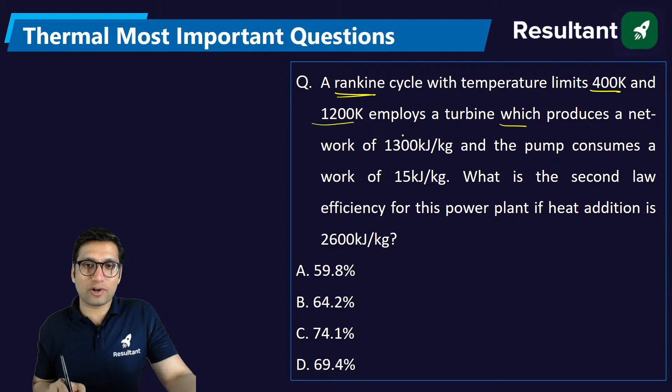Rankine cycle with temperature limit of 400 and 1200 employs a turbine which produces a net work of 1300, and the pump consumes a work of 15. What is the second law efficiency for this plant if heat addition is 2600 kilojoule per kg?

How to find the second law efficiency? First of all, second law efficiency is the ratio of actual efficiency to the Carnot efficiency. Carnot efficiency you can find if the temperatures are given: it is 1 minus lower temperature by higher temperature. Since temperatures are given, this is 1 minus 400 by 1200, so 66.6%, which is 2 by 3.

Now actual efficiency will be equal to net work divided by heat supplied. What is the net work? It is turbine work minus pump work divided by heat supplied. Turbine work is given as 1300, pump work is 15, divided by heat supplied 2600. Solve it and you will get the actual efficiency. Just put it in this relation and you will get the value of second law efficiency.

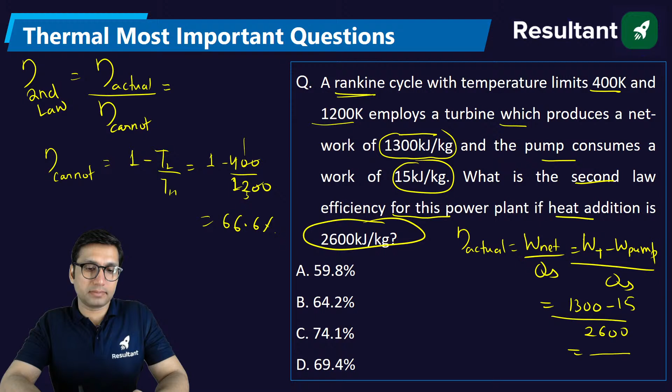So you will get 49.4%. If you put that in the relation, 0.494 divided by 0.66, you will get the efficiency as approximately 74.1%.

Are you all getting this value? Tell me. Hello Raj Verma, Neeraj, good evening, welcome to the session. So this was question number 1, where we have calculated the value of second law efficiency.

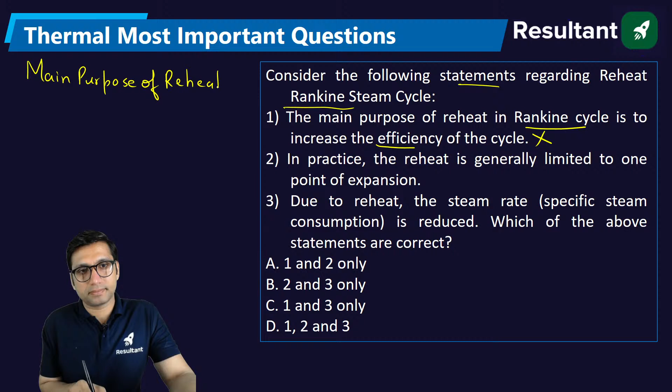Consider the following statement regarding reheat Rankine cycle. The main purpose of reheat in the Rankine cycle is to increase the efficiency. This is wrong, as the main purpose of reheat is to increase the dryness fraction. So the first statement is not correct, and this will not be correct either. Automatically you will get the answer as option B.

In practice, what does that mean? Practically, reheat is generally limited to 1 point of expansion. What is the meaning of 1 point of expansion? When you do reheating in the Rankine cycle, reheating is nothing but multi-stage expansion with reheating in the turbine. So firstly you do expansion, then reheat, then expansion again. Practically we do 1 stage of expansion, then reheat, because 1 reheat increases efficiency by 5%. If you do 2 reheats, efficiency also increases, but after 2 reheats efficiency decreases. So you don't need to do more than 1 or 2 reheats.

Due to reheat, the steam rate is reduced, because reheating increases the net work. So if net work increases, steam rate, which is equal to 3600 divided by net work, will reduce.

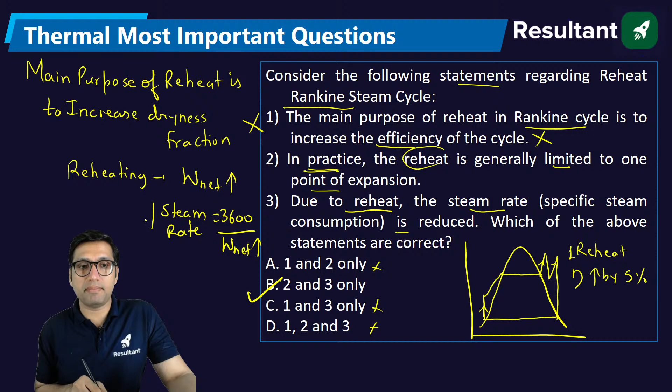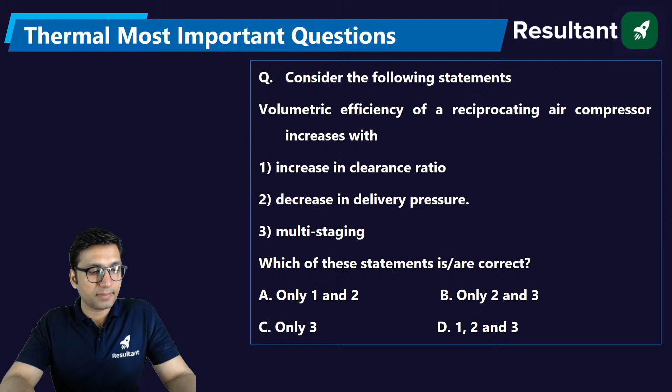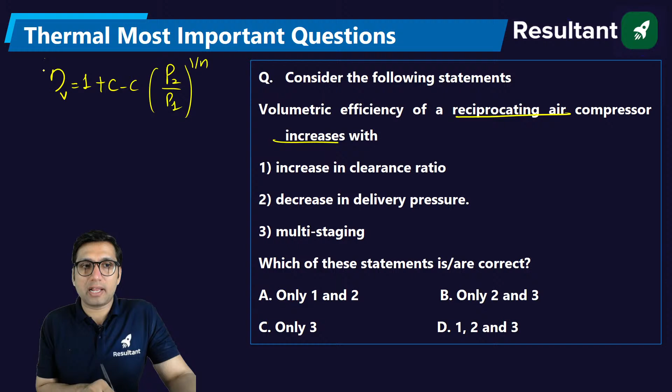Consider the following statement. Volumetric efficiency of a reciprocating air compressor increases with... We are talking about a reciprocating air compressor. What is the volumetric efficiency formula? It is 1 plus C minus C times (P2/P1) power 1/N. This is the formula for volumetric efficiency of a reciprocating air compressor. Now, how does volumetric efficiency increase?

With increasing clearance ratio? No, because if you increase the clearance ratio, volumetric efficiency will reduce. This is wrong. Decrease in delivery pressure? Yes, if you decrease the delivery pressure, then the overall pressure ratio will decrease, and the volumetric efficiency will increase. This is correct.

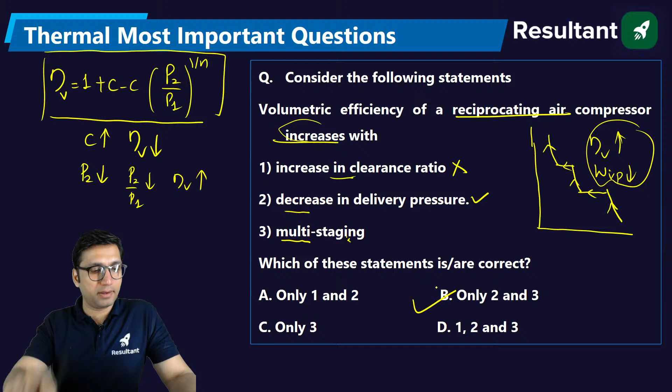Multi-staging is actually done for increasing the efficiency. If you do multi-staging in the compressor, multi-staging is done for the purpose of increasing the volumetric efficiency and decreasing the work input. So yes, this is correct, and the other is wrong, so the answer will be option B, 2 and 3. Very good, Neeraj MS, very good.

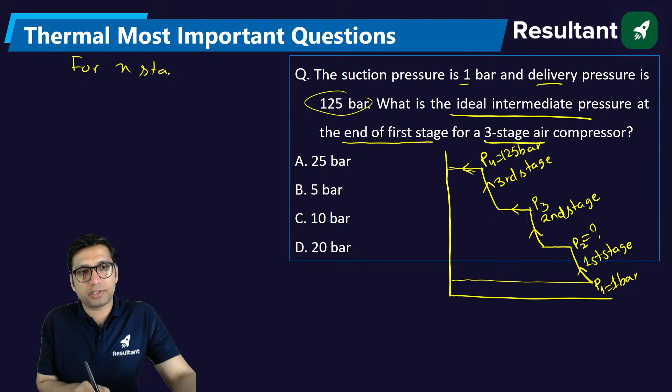For n stages of compression, the formula is P(n+1)/P1 equals (P2/P1) raised to power n, where n is the number of stages of compression. How many stages are there? 3 stages, so n equals 3. Putting the values here, you get P4/P1 equals (P2/P1) power 3. So P4 is 125, P1 is 1, and solving P2/P1 to power 3, you get P2 equals the cube root of 125, which is 5 bar.

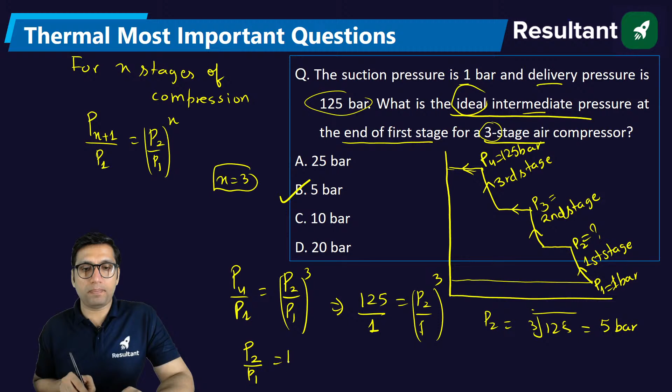You must be thinking, sir, what's the need for so much elaboration and detail? Because maybe next time they can ask you to find P3. So how will you find P3? You should know that in multi-stage compression, when the ideal intermediate pressure is asked, P2/P1 equals P3/P2 equals P4/P3 — the pressure ratio becomes the same. So if they ask for P3, you should know P3 equals P2 squared times P1, that is 25 bar. Next time maybe they'll ask you the value of P3.

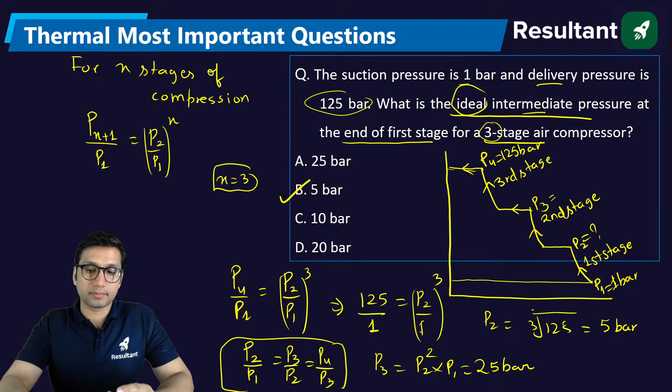Next question. In a single stage reciprocating air compressor, the work done on air to compress it from suction pressure to delivery pressure will be minimum when the compression is... So basically there are different ways to compress air. You can compress it by adiabatic process, by polytropic process, or by isothermal process.

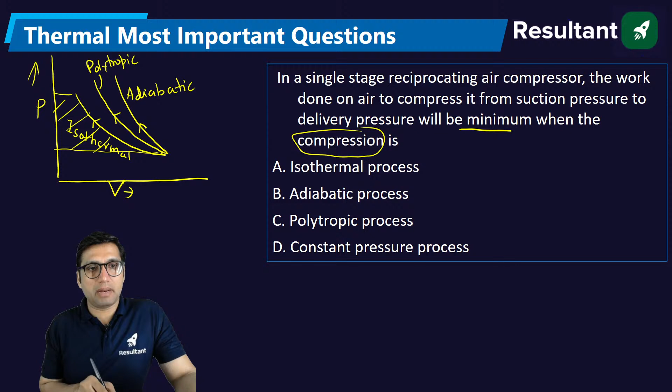So it's a pressure and volume diagram. You can do any of these compressions. So which will be producing minimum work, or which will require minimum work for compression? Obviously, isothermal compression. The minimum work of compression will be isothermal compression.

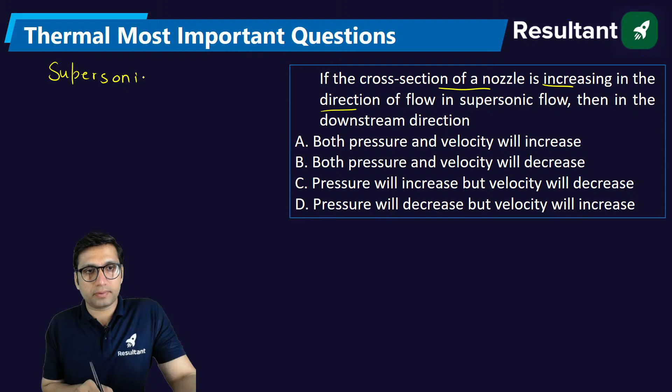If the cross section of a nozzle is increasing in the direction of the flow in supersonic flow, then in the downstream direction the area is increasing. So firstly, they are saying it is a supersonic flow. And for supersonic flow, in the direction of flow, cross section means area is increasing. If area is increasing in the direction of the flow, that is here the area is A1, this is A2. So if A2 is more than A1, this is called a divergent nozzle.

So it will become a divergent nozzle for supersonic flow where Mach number is greater than 1. So if it is a nozzle, then what will happen? In a nozzle you get pressure reduced and velocity will increase. So pressure will decrease, velocity will increase. Option D will be the answer.

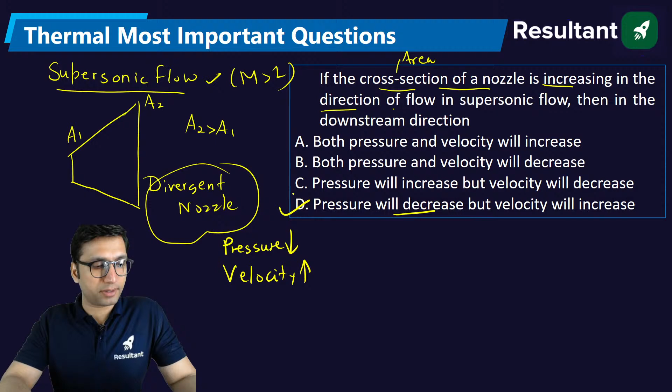Next, in the power plant, the efficiencies of electric generator, turbine, boiler, thermodynamic cycle, and overall the plant, all these efficiencies are given. The total electricity generated for running the auxiliary will be asked. Basically, there are different components in the power plant. You know that in the power plant we have many components. So we have generator, turbine, boiler, thermodynamic cycle, and overall plant cycle efficiencies. So basically the generator efficiency is given.

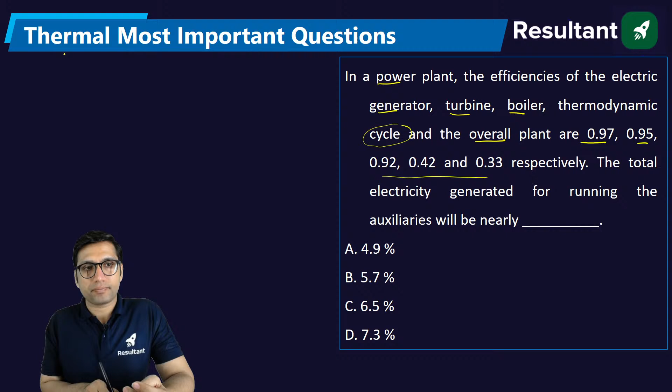Generator efficiency is 0.97. Turbine efficiency is given, which is 0.95. Boiler efficiency is given, which is 0.92. Cycle efficiency is given 0.42 and overall efficiency is given, which is 0.33. How to solve this question? You have to find the total electricity generated for running the auxiliary.

So overall efficiency will be equal to efficiency of generator into turbine into boiler into cycle into auxiliary. We'll also multiply with auxiliary. So just put everything, you will get 0.33 is equal to 0.97 into 0.95 into 0.92 into 0.42 into efficiency of the auxiliary. So you will get efficiency of the auxiliary from here. But you don't have to tell the efficiency, you have to tell the electricity generated for running the auxiliary.

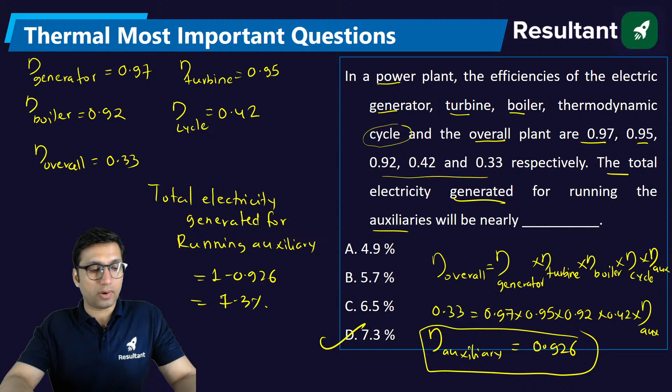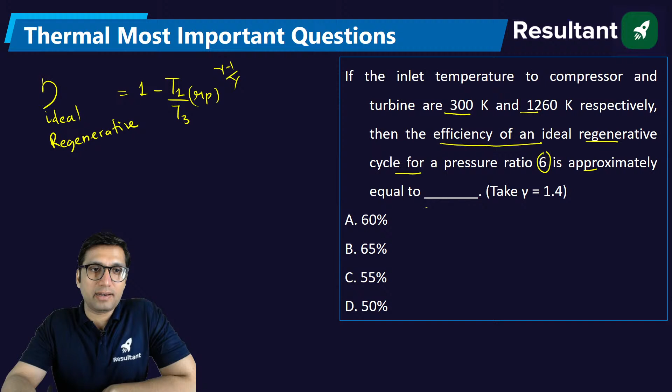1 minus T1, what is T1? 300. What is T3? 1260. Into pressure ratio is 6, to the power 1.4 minus 1 by 1.4. Solve it, you will get the answer. This is a direct formula for efficiency of an ideal regenerative Brayton cycle. So you will get, when you solve it, 60.3%, that is 60%.

You need to figure out that they are talking about Brayton cycle. They are talking about which turbine, because they are talking about compressor. Which turbine will be having a compressor? Obviously, they are talking about gas turbine, without any doubt.

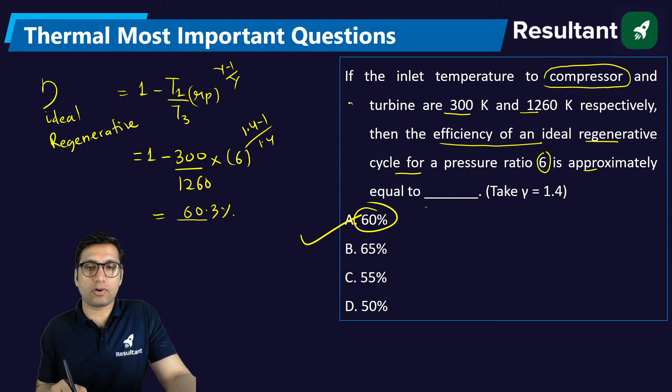In an impulse turbine, the tangential velocity of the steam at root radius of 200 mm is 420 meter per second. If the blade height is 120 mm, then tangential velocity at the tip will be.

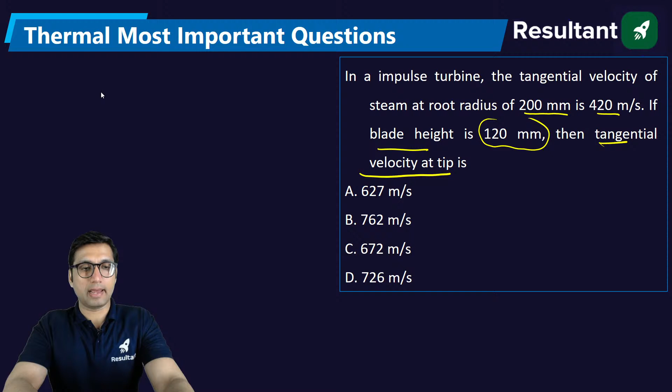So how are you going to solve this question? Now you guys try to solve it. I'm giving you some time. And if you're not able to solve it, obviously I will explain it.

I think many of the students have gotten so serious about this RRB JE notification that they are thinking they will only study for CBT 1.

Okay, solve it. No idea. Okay, no idea.

How to solve this question? The tangential velocity of the steam at root radius is 200 mm, and the value given is 420.

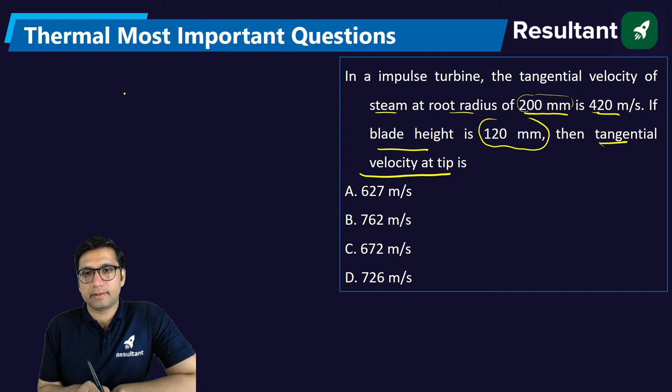Do you know they are talking about tangential velocity? Tangential velocity is equal to omega into r. This is one relation we use for tangential velocity, so we can say it is directly proportional to radius somehow. So u1 by u2 is equal to r1 by r2. You can use it because they are asking about both tangential velocities, and tangential velocity is related to angular velocity like this, u is equal to omega into r.

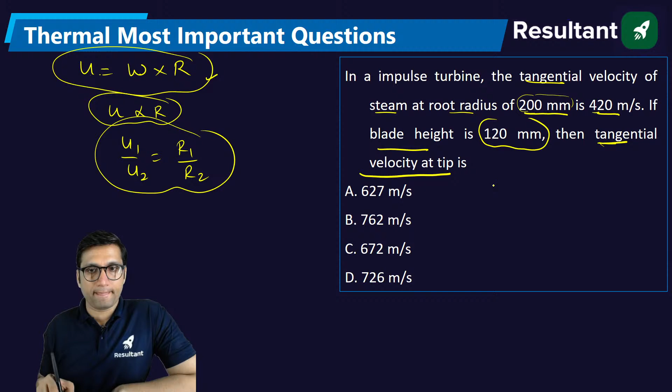So u1 is equal to 420, u2 you have to find, r1 is equal to 200, and blade height is 120. Now, but they have given the blade velocity and blade height, they have not given the radius. So just let me check.

So what will be the outer radius? R2 radius will be equal to R1 plus H, the blade height. So that is 200 plus 120, it will be 320. So 320 mm will be R2. Now I guess you can solve it.

You will get U2 equal to 420 into 320 divided by 200. This will get cancelled, this will get cancelled, 2, 16, so it will be 42 into 16. Solve it, you will get the answer. This is also an important question, can be asked in some exam. So you will get 672 meter per second.

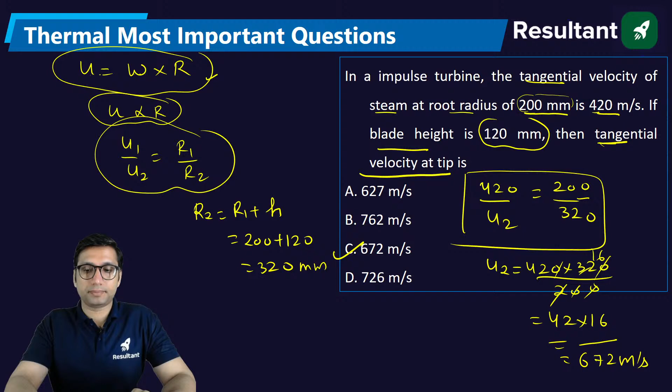Next question, assertion reason based question. In a gas power turbine, the efficiency of the cycle is 0 when the pressure ratio is unity. Reason: in a gas turbine cycle working on simple Brayton cycle, efficiency of cycle becomes 0 when it is having a maximum pressure ratio.

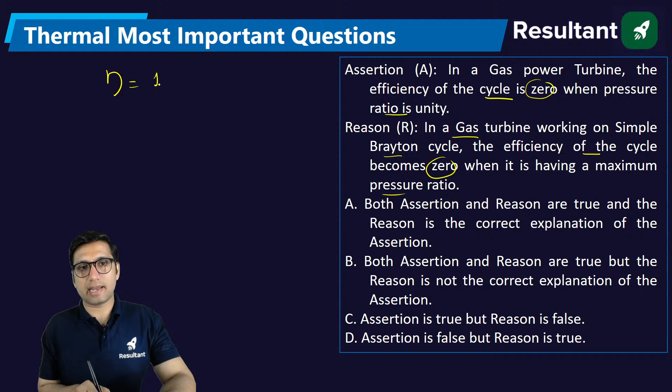So this is correct: in a gas turbine cycle on simple Brayton cycle, efficiency of cycle becomes 0 when it is having maximum pressure ratio. When pressure ratio becomes maximum, efficiency of the Brayton cycle becomes equal to Carnot cycle, and it also becomes maximum efficiency, not 0 efficiency. So this statement is wrong, this one is right. Assertion is true, reason is false.

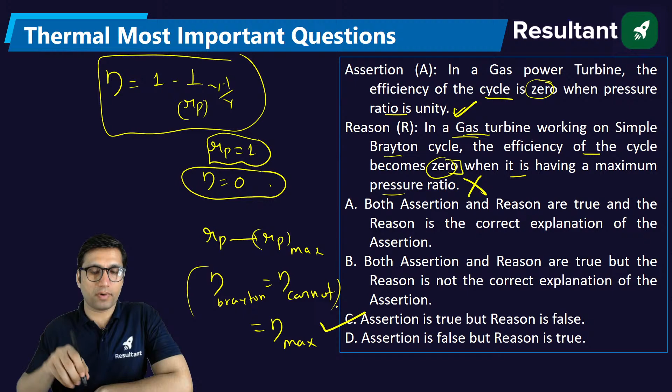The temperature limits in a Brayton power plant are 400 and 1600. If the index of the working medium employed is 1.5, calculate the optimum pressure ratio for maximum work. What is the formula for optimum pressure ratio in the Brayton cycle?

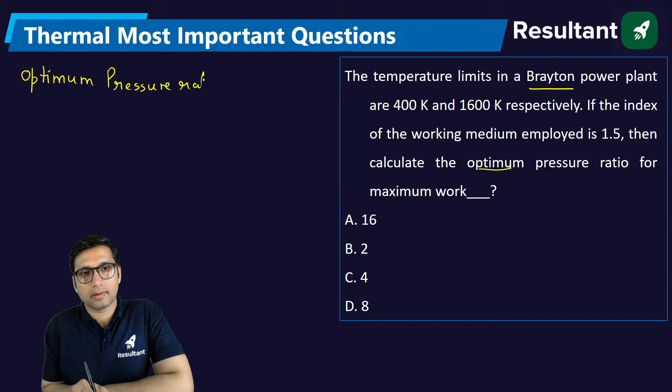Optimum pressure ratio is T3 by T1 to the power of gamma over 2 gamma minus 1. Here is the formula. Just put the values: T3 is 1600, T1 is 400, these are the temperature limits. Gamma is 1.5, so it's 1.5 by 2 times 1.5 minus 1. Okay, 4 to the power of 1.5. Solve it.

So the answer will be option D. All right.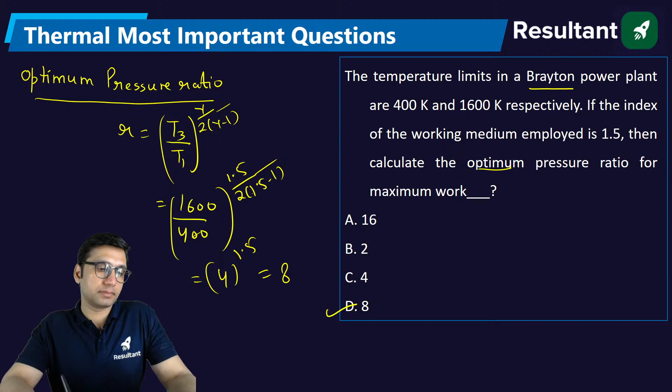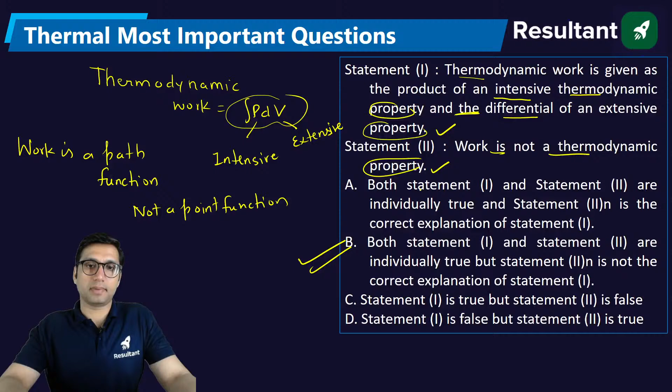Okay, not a point function. And properties are point function. So they have not given the reason for the first statement, they are simply saying work is not a thermodynamic property. So both are true, but both are not related.

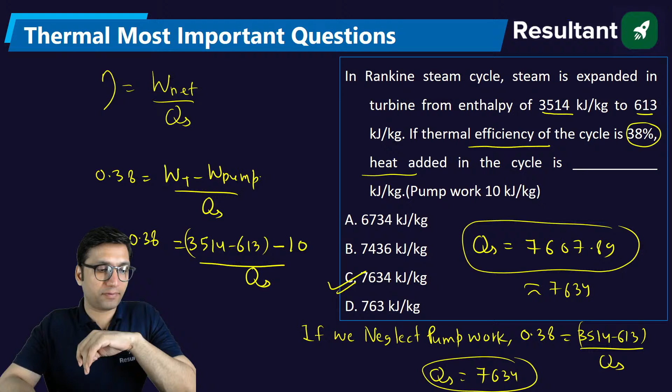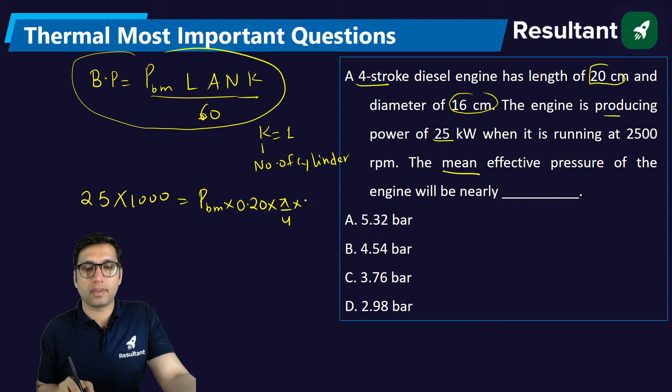So 25 divide by 1000, if you divide by 1000, then you will get kilowatt. 25 kilowatt is equal to... or you can, if you don't want to divide by 1000, it's fine, you can simply put 25 kilowatt as watt into 1000 in watt, brake mean effective pressure into L. L, the stroke length, is 20 centimeter, that is 0.20 meter, and area will be pi by 4 into d square, 0.16 square, into RPM which is 2500 divided by 60. Solve it and tell me the answer. I guess we have to use n by 2.

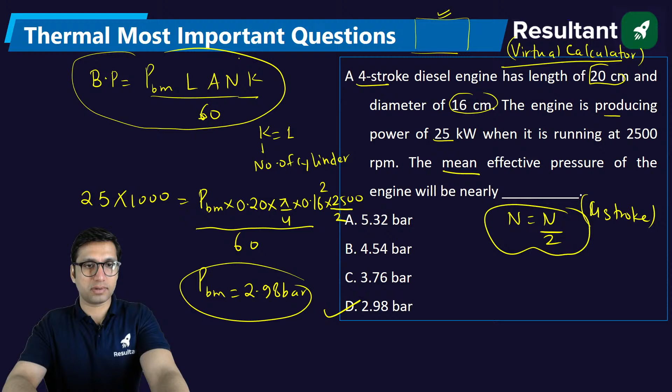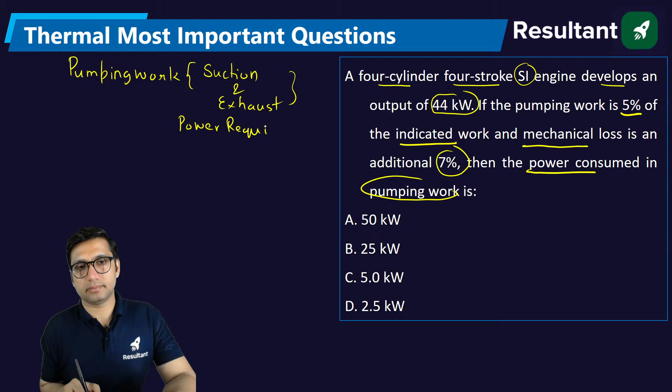What do you mean by pumping work in engine? Pumping work is basically, in the engine there are some operations like suction and exhaust. For these operations, the work which is required, the power which is required for suction of charge and exhaust of gases, that is called pumping work.

Okay, and how do you get the power for this? This power is actually part of indicated power only. The power which is required for pumping is actually derived from indicated power only.

So pumping loss, how much is the pumping loss? Pumping loss is 5% of indicated power, that is 0.05 of indicated power. And mechanical loss is additional.

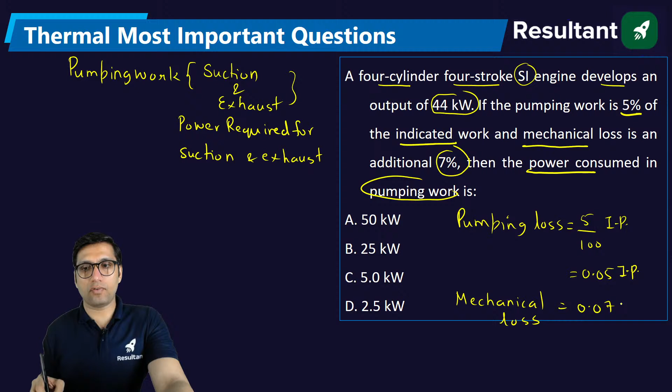Mechanical loss will be from which power? Which power is required for mechanical loss? That is, mechanical loss is frictional losses, which is 0.07 of indicated power only.

So what is the formula for brake power? Brake power is equal to indicated power minus, actually these pumping and mechanical losses, they both come under frictional loss or friction power. Brake power is equal to indicated power minus friction power. And this power consumed in pumping and mechanical losses, that is actually friction power.

So this is indicated power minus 0.05 of indicated power minus 0.07 of indicated power. Solve it, you will get indicated power minus 0.12 of indicated power, or you will get 0.88 of indicated power. What is brake power? The brake power is 44 kilowatt, so indicated power will be equal to 44 by 0.88.

So from here you will get indicated power, which is 50 kilowatt, but you are interested to find the power consumed in pumping. What is the power consumed in pumping? The power consumed in pumping loss, that is 0.05 of indicated power, which will give you 2.5 kilowatt.

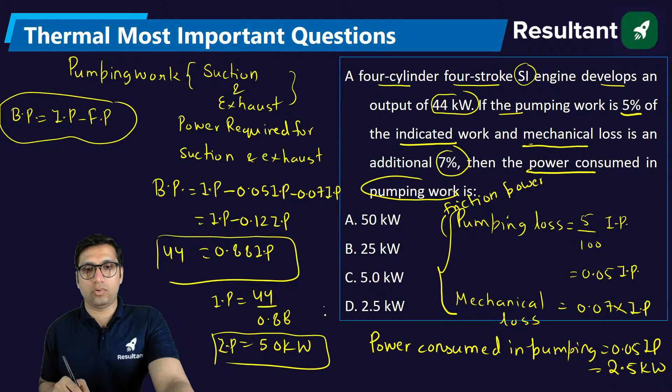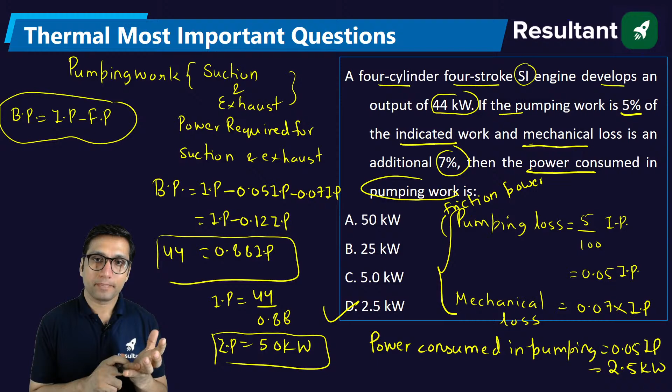2.5 kilowatt, clear? So mechanical loss and pumping work both are actually indicated friction power. The friction power is basically the power which is taken from indicated power only in order to overcome the pumping and mechanical losses.

Which of the following statements is true? On a PV diagram, the triple point is a line and critical point is a point. On a pressure-temperature diagram, both triple point and critical point are points. Both are correct, if you ask which is correct, both are correct.

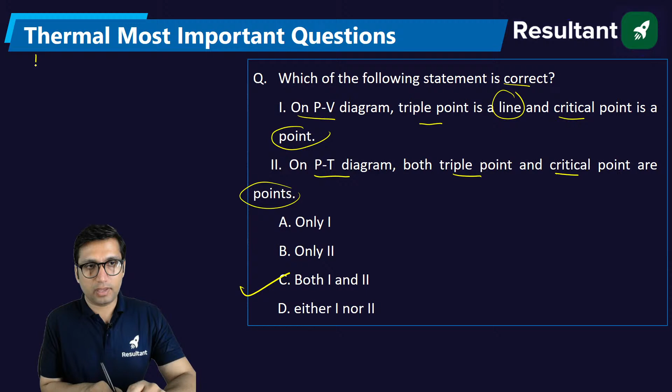On a PV diagram, if you have to show the triple line, this will be the nature of the curve. So here, this is the triple line. Triple line is a line and critical point is a point on a PV diagram.

While if you see a pressure-temperature diagram, on a pressure-temperature diagram, triple point and critical point both are points. So this is your triple point and this is your critical point on the pressure-temperature diagram.

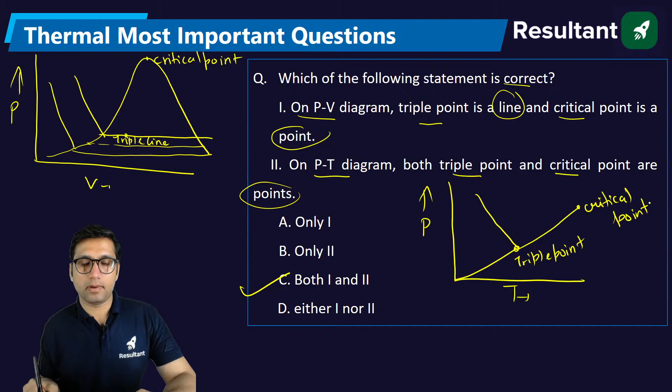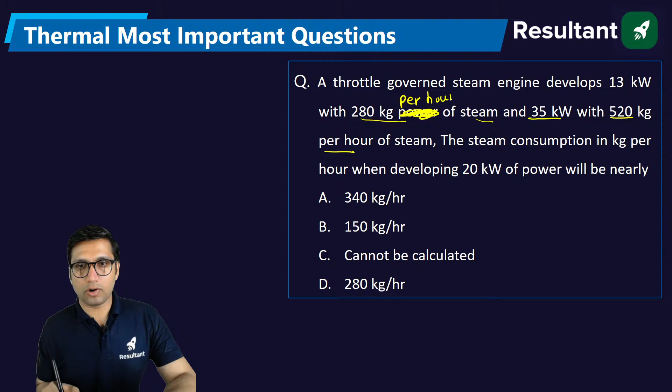A throttle governed steam engine develops 13 kilowatt with 280 kg of steam per hour, and 35 kilowatt with 520 kg per hour of steam. The steam consumption in kg per hour when developing 20 kilowatt of power will be nearly. How are you going to solve this question?

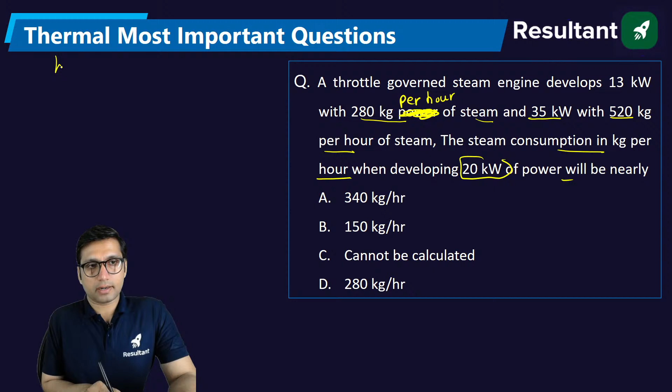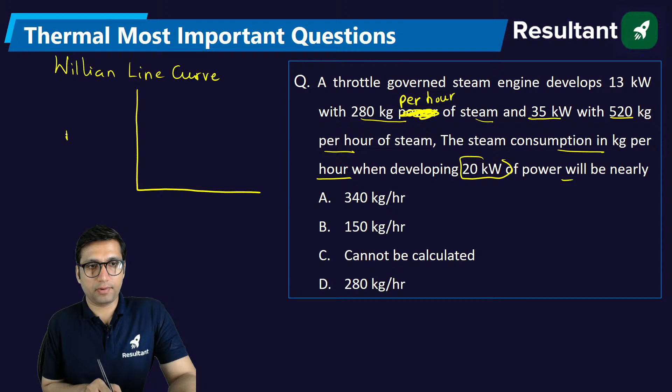You know a curve which is known as Willans line curve, which is also plotted for a steam engine. In this curve, we plot between mass of steam consumed and indicated power. The curve is somewhat like this, and the equation of this curve is mass of steam consumed equals A plus B into indicated power, where B is the slope.

This is B actually, B is the slope. It is A plus B into indicated power. So this is the equation of this curve: A is constant, B is the slope of this curve.

So the first equation is when mass of steam consumed is 280, then power is 13, equation number 1. Secondly, when mass of steam consumed is 520, then power is 35, equation number 2.

Now from equation 1 and 2 you need to find the value of A and B. Find A and B and then put them in the equation for mass of steam required to produce a power of 20 kilowatt. So if you know A and B, put it in this equation, you will get the answer. Understand everyone?

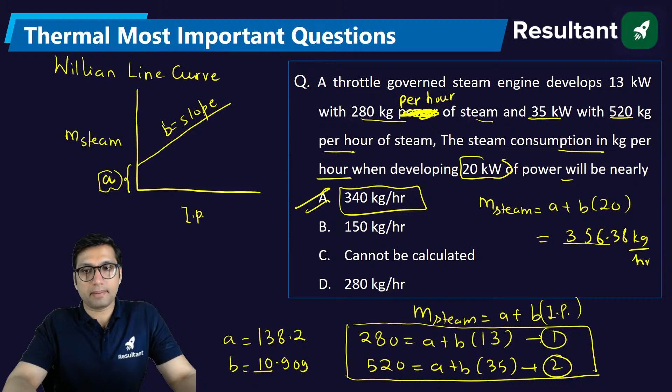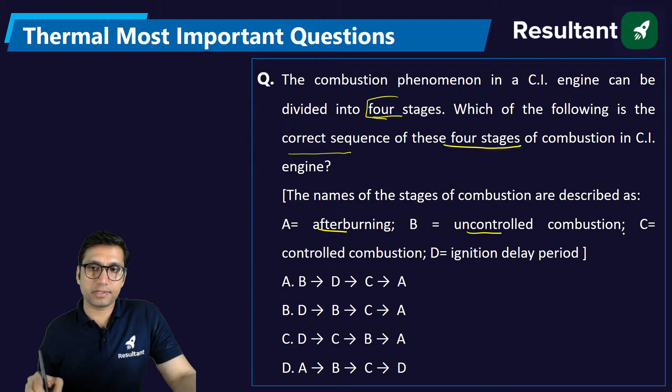The combustion phenomena in a CI engine can be divided into 4 stages. So basically in the diesel engine, combustion happens in 4 stages. Which of the following is the correct sequence of these 4 stages? What are those stages? Afterburning, controlled combustion, uncontrolled combustion, and ignition delay period. So firstly in the diesel engine, the first stage is ignition delay. Then we have uncontrolled combustion, where detonation takes place. Then we have controlled combustion, where whatever fuel and air is left burns. And the last stage is the afterburning stage. So this is the sequence of stages: D, then B, then C, then A. So DBCA, that is option B.

Very good. Next question.

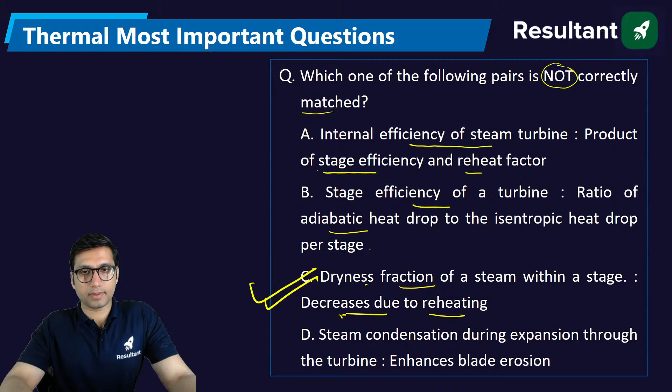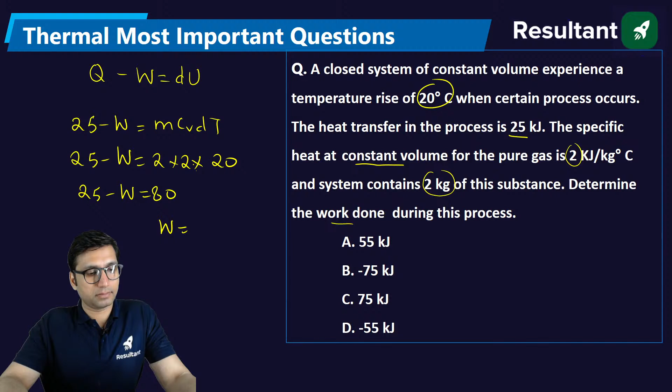A closed system of constant volume experiences a temperature rise of 20 degrees Celsius when a certain process occurs. The heat transfer is 25, specific heat at constant volume is 2, system mass is 2 kg. Determine the work done. We'll use the formula Q minus W equals dU. Heat is given as 25. dU, you know, equals mCv dT. So 25 minus work equals 2 into Cv, that is 2 into 20, so 25 minus work equals 80. You will get work from here. What value of work are you getting? So you will get work as minus 55. Work will be negative here, so minus 55 will be the answer for this question.

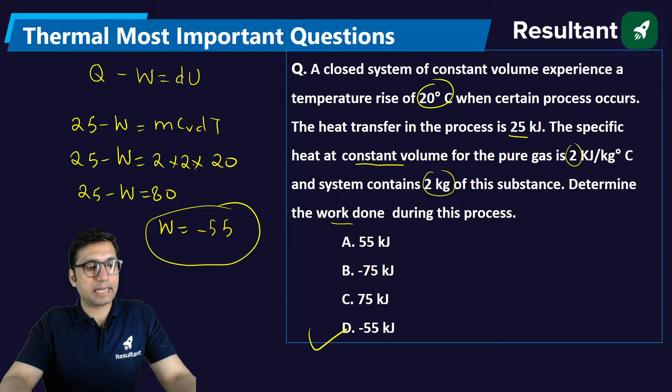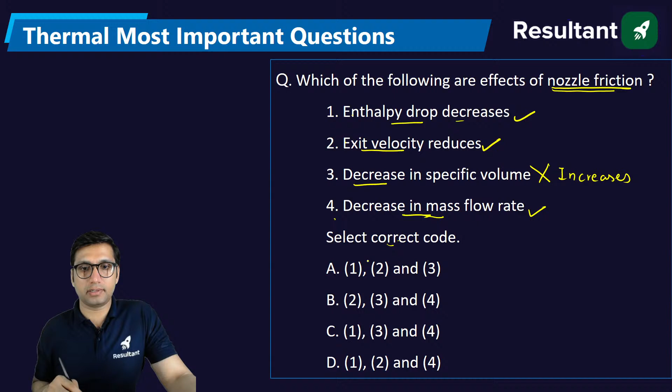Next question. Which of the following are effects of nozzle friction? Friction in the nozzle has many effects. Enthalpy drop decreases because of friction - yes. Exit velocity reduces - yes. Decrease in specific volume - actually specific volume is not going to decrease, it increases, so this is wrong. Decrease in mass flow rate - yes. So 1, 2 and 4 are the effects of nozzle friction.

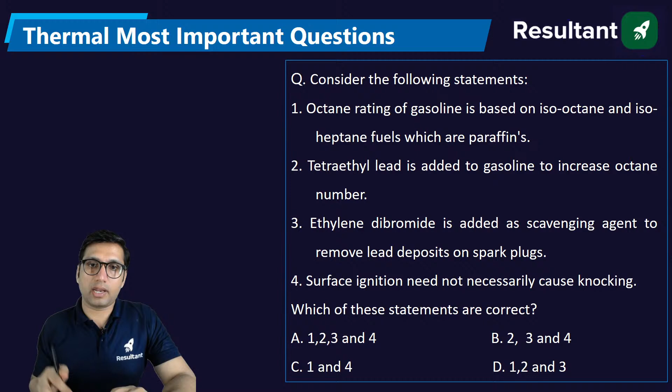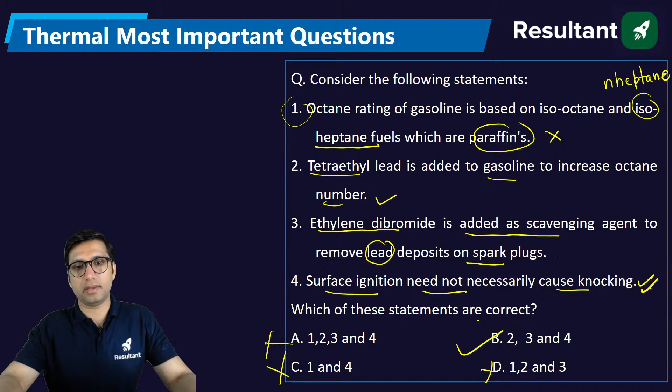Consider the following statements. Octane rating of gasoline is based on isooctane and isoheptane fuel, which are paraffins - not isoheptane, that is wrong, it is N-heptane, called normal heptane. Tetraethyl lead is added to gasoline to increase octane number - correct. Ethylene dibromide is added as a scavenging agent to remove lead deposit on spark plugs. Surface ignition need not necessarily cause knocking. Which of the following are correct? This last statement is correct - surface ignition does not necessarily cause knocking. The first option is not correct for sure, so this and this cannot be the answer. The answer is option B: 2, 3 and 4. Very good.

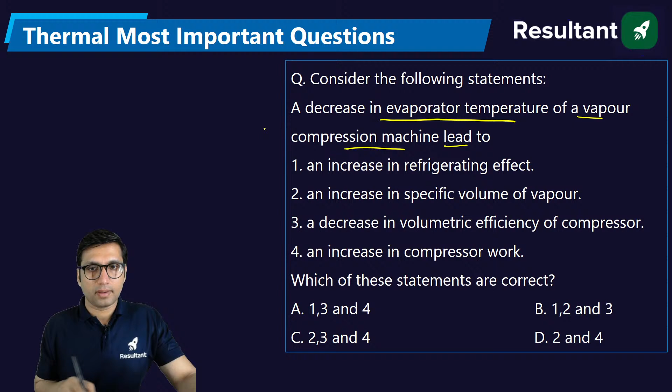Consider the following statements. A decrease in the evaporator temperature of a vapor compression machine leads to... Okay, the evaporator temperature is decreased in the vapor compression machine. So this is a vapor compression machine, and the temperature of the evaporator has reduced.

If the temperature of the evaporator reduces, work input will increase and refrigeration effect will decrease. Because of that, what will happen to volumetric efficiency? It will decrease. Will refrigeration effect increase? No, there will be an increase in specific volume of the vapor and decrease in volumetric efficiency.

There will also be an increase in specific work. So this option is correct and this one is correct, that is options 3 and 4 are correct. There is no other option. We have to mark increase in specific volume of vapor, so 2, 3 and 4 will be the right answer.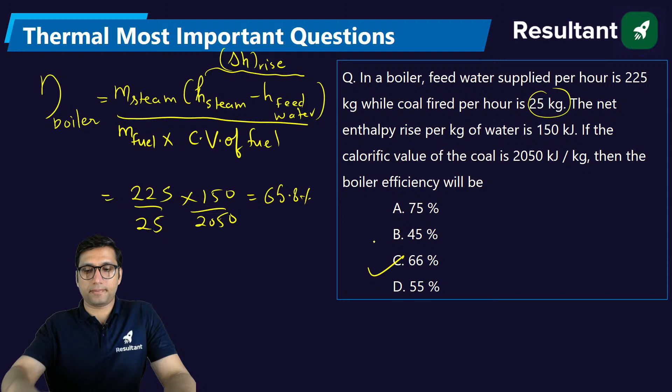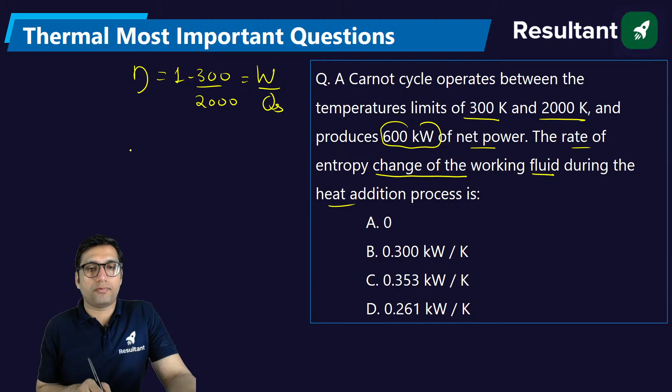Next question. A Carnot cycle operates between temperatures of 300 and 2000, and produces 600 kilowatt of net power. Find the rate of entropy change of the working fluid during the heat addition process. How to solve this? Since it's a Carnot cycle, the efficiency is 1 minus 300 by 2000, which is equal to work by heat supplied. From here you get the value of heat supplied.

Heat supplied will be equal to work, 600 into 2000 divided by 1700. You will get heat supplied from here. Entropy change during heat supplied is equal to heat supplied divided by temperature at heat supplied. This is the last question for today's session. 600 into 2000 divided by 1700 gives 705.88 kilowatt as heat supplied. Divide by heat supplied temperature, so you will get 0.352 kilowatt per Kelvin, option C.

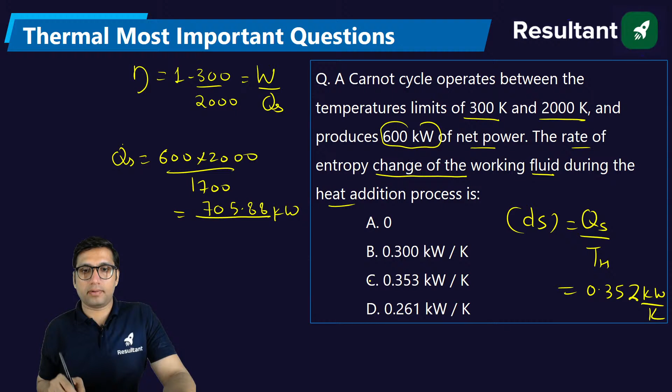This is also one question, let's take this as our last question. In an Otto cycle, temperature before adiabatic compression and at the end of adiabatic compression are given: T1 is 27, T2 is 527. Temperature before beginning expansion, T3, is 1127. Find temperature at the end of expansion, T4. How to find T4?

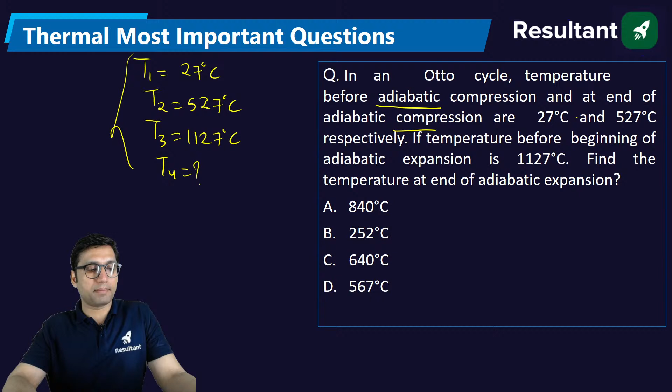I hope you know something about the Otto cycle that you should know: T2 by T1 is equal to T3 by T4, which is equal to V1 by V2 to the power gamma minus 1, that is compression ratio to the power gamma minus 1. So T2 by T1 equals T3 by T4 in the case of the Otto cycle. Just apply this, you will get T4.

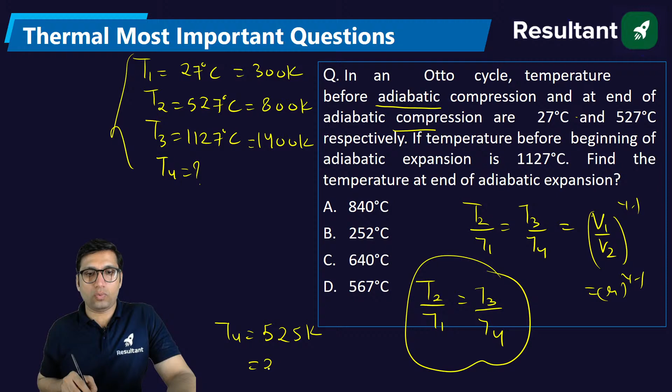Just convert this into Kelvin: this will be 1400 Kelvin, 800 Kelvin, 300 Kelvin. You have to get the answer in degrees Celsius later on. So you will get T4 as 525 Kelvin, which is 252 degrees Celsius. That's the last question.